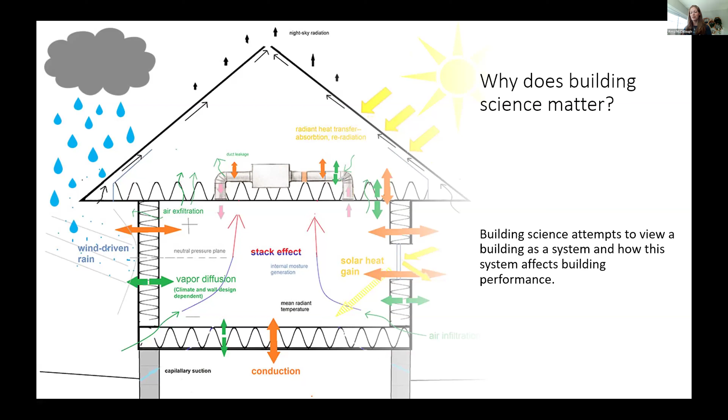What really is going to impact the science of your building and the performance of your building are your walls. Glazing is obviously a very important part of your building performance, your roof, your slab, your HVAC performance—all of that works together. But what we're going to be talking about today is your walls.

And when we talk about walls, we have four control layers: a rain control layer, an air control layer, a vapor control layer, and a thermal control layer. We're going to talk about each of these layers and what they actually mean. What is an air barrier? What is a rain control layer? But what we really want to focus on whenever we're looking at a building is thinking about protecting the structure.

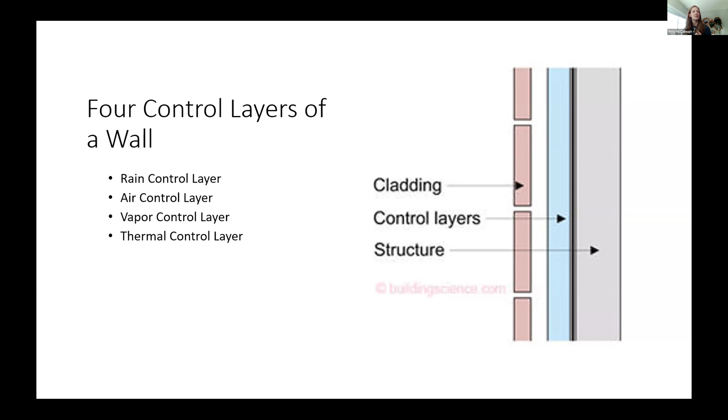Your typical commercial building is going to be a steel stud or a mass wall. When we think particularly about steel studs, we want to create a wall assembly that will protect those steel studs—they're going to be there for a very long time. We want to protect our structure and make sure it can withstand the test of time.

So what is a rain control layer? We know that our buildings will experience rain. I cannot think of a location where it never ever rains, although I'm sure there are some on the planet. We will experience rain, particularly wind-driven rain—not rain that is falling just down nicely, coming off your roof through your gutters and doesn't really drive against the wall. What we're worried about is that rain that comes up hard against your wall and how that is going to impact your structure.

Typically, and this is the most common rain control layer we see, we have a cladding system—brick veneer or metal panels that can allow rain through them, and then they hit our rain control layer. That rain washes down and comes out the bottom of the wall with a flashing, with a drip edge. This is the most common type of rain control layer, but there are three types we're going to talk about: the first is storage or mass walls, then we have barriers and a drained layer. This is a good example of a drained layer, but we'll go through more here in a minute.

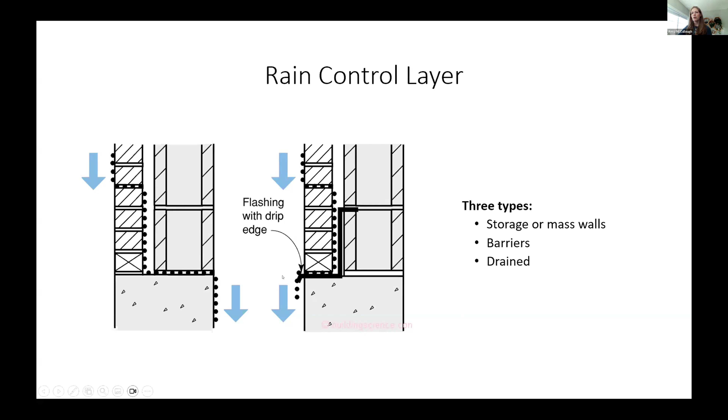Storage or mass walls are also considered to be a rain control layer. So what happens when we have a masonry wall, for example, is that the wind-driven rain hits the wall, and that wall is actually designed to absorb that water and then dry out. That's the key here—when we have these really thick mass walls, they have the potential to dry.

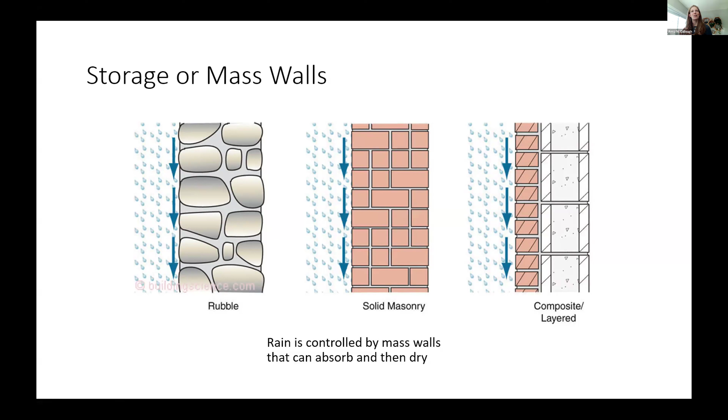I'm going to talk a lot throughout this entire hour about making sure that our walls can dry out, because it is so important.

The next type of rain control layer would be a barrier. These are portions of your wall that, by the type of material they're built out of, will not allow any rain to pass through. So structural glazing, unless you're at a seam, or unless you're at the edge of a panel of glass, you're not going to see any potential for rain passing through. Same with steel-clad panels or a face-sealed EIFS. It's an impermeable surface that will not allow for any water absorption.

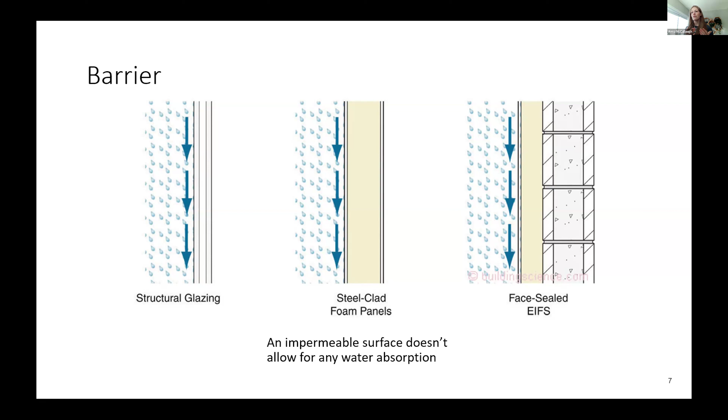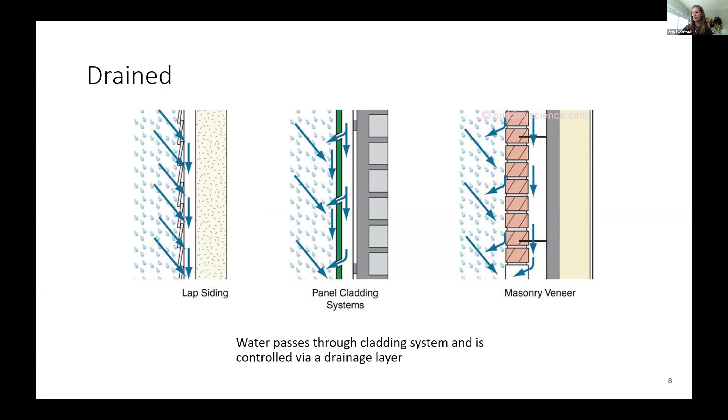The last and most common type of rain control layer is a drained assembly. Rain passes through our cladding system and is controlled via a drainage layer. We have an air gap that allows water to drain down the facade of the building and then pass out through flashing. So that's our rain control layer, the most easily understood layer of a wall, in my opinion. We want to keep rain out, and we want to make sure there's a way for that rain to escape if it does get in.

The next layer we're going to talk about is an air control layer. This is really important because infiltration can make up 10 to 30% of a building's annual energy use unless your air barrier, or air control layer, is continuous. So we're going to talk through a scenario with a negatively pressurized plenum, and how that can impact your infiltration, and why an air barrier is so important, as we get through these next few slides.

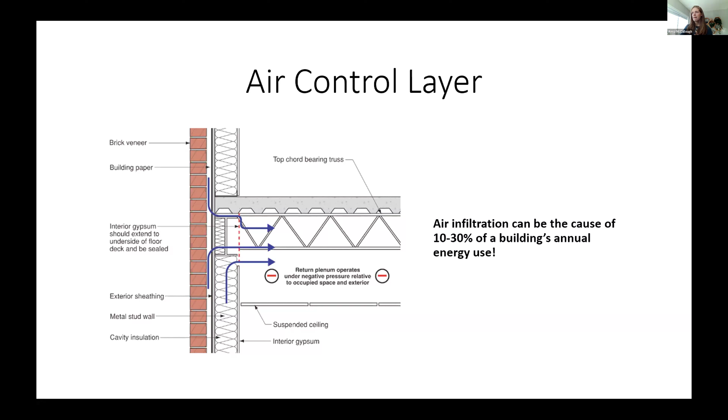An air barrier is the material that separates the outside from the inside, and nothing can pass through it. It is impenetrable - you're not going to get any air passing through it from the outside to the inside. The energy codes, as they've developed, have made it even more clear and really emphasized the necessary requirements and performance of the air barrier, making sure that it is continuous.

We're talking a lot today about walls because it's kind of the basis for building science, in my opinion. But anytime you have a section where a wall is interrupted by a window, or where your wall meets your roof, or where your wall meets your slab, you're going to have a more complex issue than what we're going to cover today. But the key thing about building science, if you take away anything from this presentation, it's that all of these control layers should be designed to protect the structure and should be continuous.

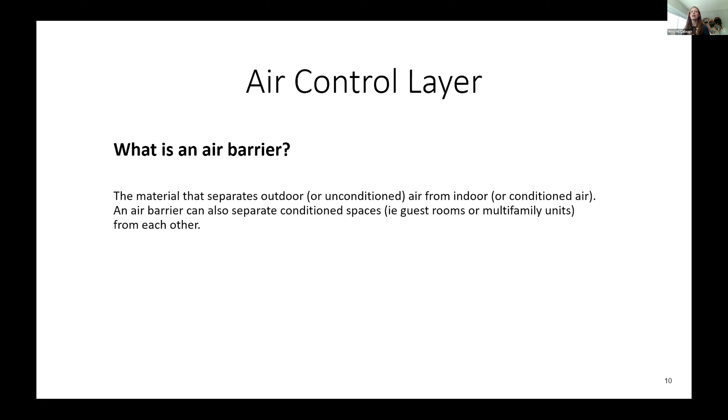Your air barrier should be continuous. Your thermal envelope should be continuous. We don't want to see those breaks that allow infiltration into the building and drive up your heating and cooling loads. So the requirements for an air control layer are that it is impermeable and that it is continuous.

There's multiple examples of that. We're going to talk through exterior air barriers and interior air barriers and what we recommend. But the most common examples we see of air barriers are exterior self-adhered membrane sheets, precast or tilt-up concrete panels - those count as an air barrier - or interior gypsum board can also be an air barrier.

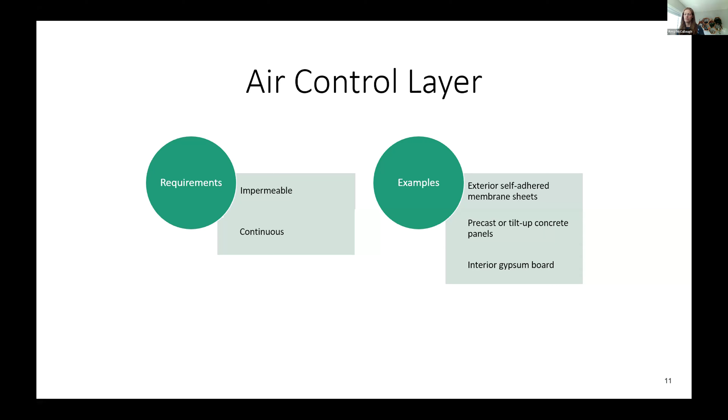So I put hearts here - I figured I was on theme for February. We love an exterior air barrier. Nobody likes an interior air barrier when you're in a cold climate. An exterior air barrier is always recommended in cold climates. We want to make sure we're not allowing cold air to get past our control layers and into our structure, because then you're going to run the risk of condensation, and we'll talk through why in a few more slides. That exterior air barrier also has the secondary benefit of reducing wind washing within the structure. You have a wind force driving against your structure, and with an exterior air barrier, you're going to reduce that wind blowing through your structure.

Interior air barriers are harder to install than exterior. Joints at walls and floors must be sealed.

The benefit of an interior air barrier is that it reduces moisture-laden interior air from infiltrating into your structure cavity, which is a good thing. But we're going to talk about balancing that risk with your other control layers to optimize the building envelope for your climate and for our climate.

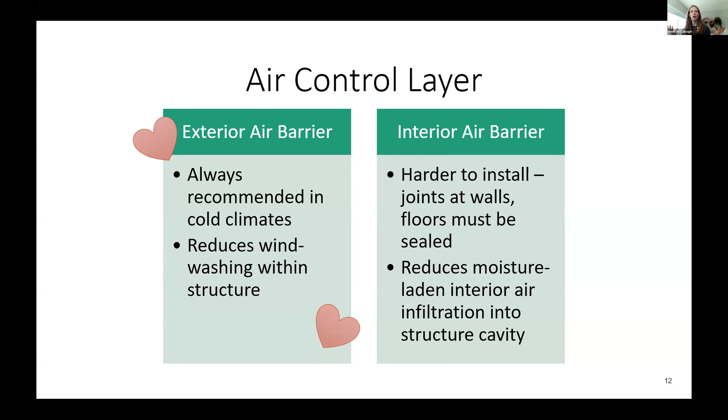Let's talk through this example. This is an example of an interior air barrier, in a multifamily building. The interior spaces are positively pressurized, which we always recommend, right?

We want to have a positive pressure as compared to the outside. The reason for wanting a positive pressure as compared to the exterior is that we want to reduce that infiltration.

In this example, we have fan coil units above the ceiling, creating a negatively pressurized plenum. That fan coil unit, with an interior air barrier, would create a negatively pressurized plenum. Because of that, the interstitial spaces between units—or in a hotel, between guest rooms—become negative. So the walls between these units are negative, and they will suck air in because we do not have a continuous exterior air barrier.

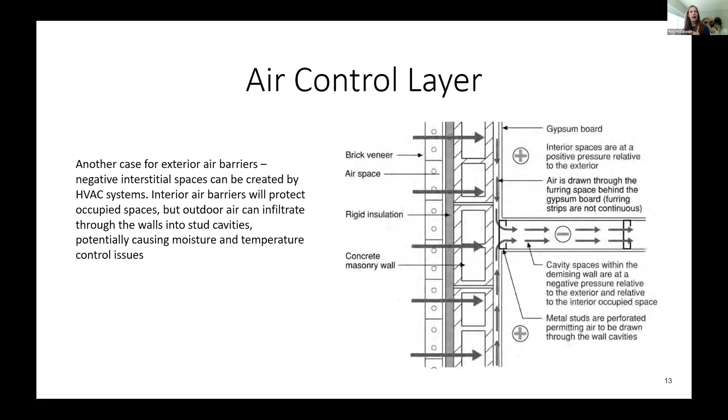And in a minute, on the next slide, stack effect. So we have two examples here of stack effect, when it's cold outside and when it's hot outside. Across the center of these buildings, we have what's called a neutral pressure plane, and that's where the stack effect pressure basically changes.

The best way to think about stack effect is from the idea that we all know hot air rises. So when it's cold outside—we can talk about stack effect on a residential home that's two stories, but it really starts to impact things when we're looking at a multi-story tower. This is a good example, where we have our elevator shaft running up the middle.

What's going to happen is, when it's cold outside, hot air rises and exfiltrates from the top floors. Because of that, the pressure tries to balance, and we end up pulling air in at the ground floors. That's the easiest way to think about it.

And the opposite happens when it's hot outside—we have cold air exfiltrating to the exterior in the summer, and hot air coming in on the upper floors. So stack effect is directly impacted by the height of the building, but we can reduce this infiltration and exfiltration by providing a really solid, continuous exterior air barrier, not allowing the air we've worked so hard to heat and cool, and spent so much energy on, to escape or bring in additional loads via infiltration.

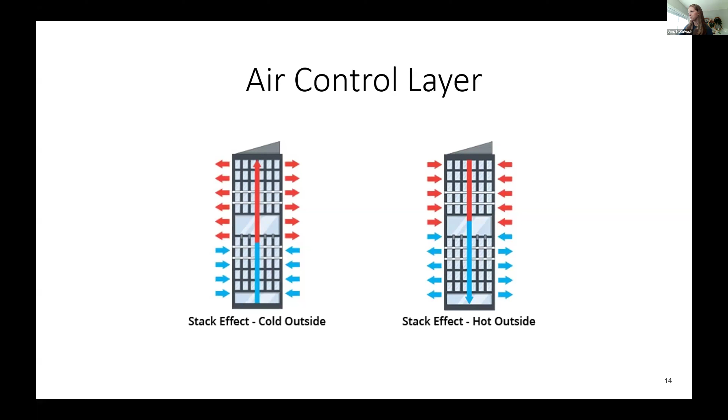The next layer we're going to talk about is a vapor control layer. Oftentimes we hear these being called vapor barriers, and that's really not what we want. Previously, we talked about how important it is to allow a wall system to dry, and we talked about our air barrier being continuous on the exterior.

If we have an impermeable vapor barrier on the interior side of our wall, we can have vapor drying to the exterior from the exterior side of our air barrier, but any vapor within your stud cavity doesn't have anywhere to go. It can't cross the air barrier, and it can't cross the vapor barrier you've installed. So really what we're looking for is called a vapor retarder.

We want to reduce the amount of water that will infiltrate into the wall system from the interior. Think about a multifamily unit, for example—somebody sitting in their living room knocks over a cup of water, and that water hits the wall. We don't want that water to enter into the wall, but we also want to allow any water that is within the wall to dry.

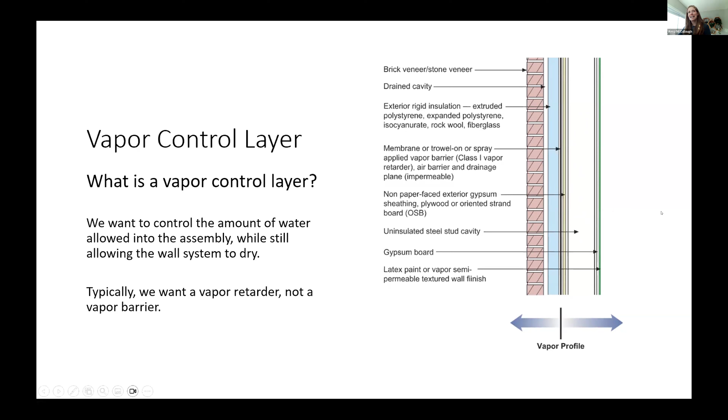So we want to make sure that those materials that were used to build the building can dry. If we have our exterior air barrier on the exterior of our structure, we want to make sure that all of the materials on the exterior side of the air barrier can dry to the outside, and all of the materials on the interior side of the air barrier can dry to the inside. So really important.

We talked about why it's important to obviously have your rain control layer on the exterior. We've talked about why an exterior air barrier is so important and why a vapor retarder is also important. But what we want to talk about as well is the thermal control layer. We know that insulation is key to reducing the heating loads that the building experiences. It allows us to keep in nice, warm air, and it allows us to keep out cold air.

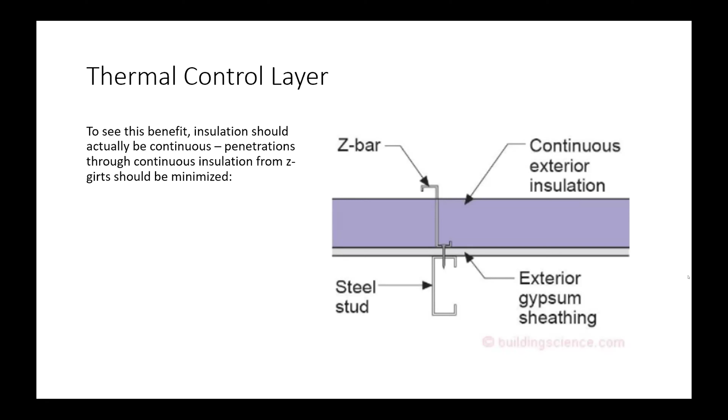There we go. Okay. Yeah, if that R19 was a closed cell or an open cell, is there a potential difference in that dew point or in moisture condensation?

The location where we're really worried about moisture condensation is going to be on the outermost face or surface of the steel studs. Because your insulation is packed within the stud cavities, what we're not seeing is any protection for this metal face of the steel stud out here. And that's where we're most concerned about the potential for condensation.

Whether or not you have a closed cell spray foam, your steel studs are going to provide such a large thermal bridge that the impact for condensation is still going to be there.

Does the closed cell spray foam help to prohibit or mitigate any of the warm air or the transfer of air through a wall to the steel stud?

If you had a closed cell spray foam that completely covered your studs, so we're talking about on the inside face, then we would see that reduction in potential for interior air to pass through. But that closed cell spray isn't going to create a fully enclosed barrier around your steel stud, if that makes sense. It does. Great. Thank you for asking a question.

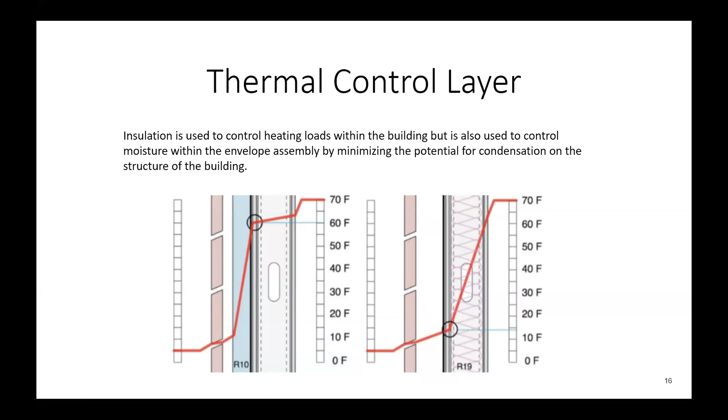So when we are looking at how to most effectively install this continuous insulation, we want to avoid what are called Z-girts. We have all seen them. They are the most common way to do this, we see them all the time. They're built on almost every building. And really, these Z-girts have the potential to reduce the effective R value of your continuous insulation by 40 to 60%.

So if you are installing an R10 continuous insulation and you install just plain old metal vertical Z-girts that are running in parallel with your steel studs, you are going to see a potentially up to a 60% reduction in the effective R value of that continuous insulation, which is a really big deal.

This is why I really try to emphasize the importance of making sure that the materials, particularly the insulation materials we're using, are being used correctly. If we install R10 continuous insulation with no batt, and we have vertical Z-girts that are continuous with our steel studs, it's like installing a potentially as low as an R4 on the exterior of your wall.

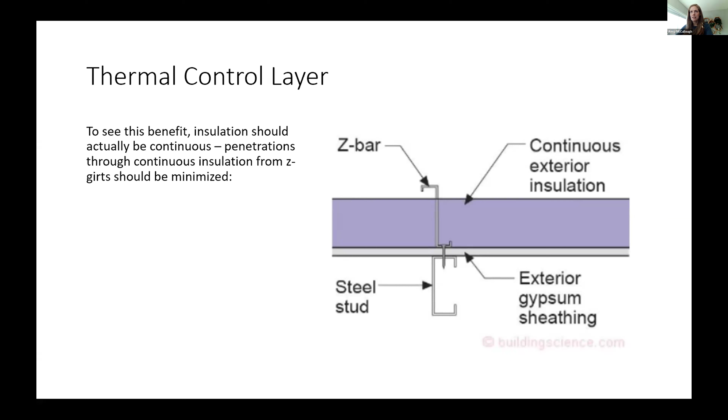So no continuous Z-girts. There are multiple ways to do this. We see the fiberglass clips. We see horizontal Z-girts. We see you can use vertical and horizontal. But in my experience, the most palatable way to do this is to use hat channels and long screws.

So you have a hat channel on the exterior face of your continuous insulation that is held to your structure via a long screw. This is still a thermal bridge. We're still going to see a reduction in the effectiveness of our R value, but rather than a 40 to 60% reduction, we're going to see a 5% reduction, depending on how often you have the screws, but it makes a significant impact.

Not using Z-girts. Those fiberglass clips are great. They are another great option. They will reduce the effective R value of your insulation by 15% or so, but it really depends on the application and how this is being installed.

So again, I'm making these recommendations as considerations. They are not going to be the end all be all, laser shot, perfect solution for every building, but this is what we recommend as a starting point.

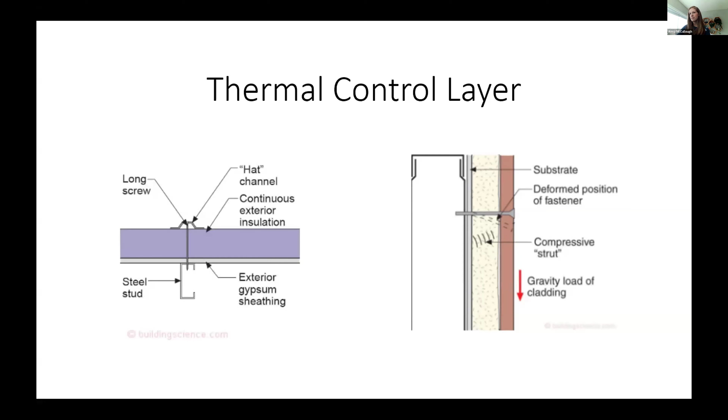Okay, so we've talked through our 4 layers: the thermal control layer, vapor control, air control, and rain control. Now we want to put all of those together and talk about what the perfect wall is. This is a wall that is allowed to dry from the exterior side of our air barrier out, and the interior side of our air barrier out. All of our control layers are protecting our structure that we so want to protect because it is so expensive.

And we are using this wall, and we'll just talk through the different parts of it very quickly. So we have our veneer or cladding system, a drained cavity that allows for rain control. We then have our exterior rigid insulation.

This could be, most often lately we're starting to see mineral wool because people are starting to think a bit more about the embodied carbon of the different types of insulation that they use, but we'll see a polyiso, an XPS, or a mineral wool.

And then we have our membrane, air barrier, and vapor retarder located on the inside surface of our exterior insulation. Then we have our sheathing, our uninsulated steel cavity, the gyp board, and then any sort of semi-permeable wall finish that allows for any vapor that is within the steel stud cavity to dry.

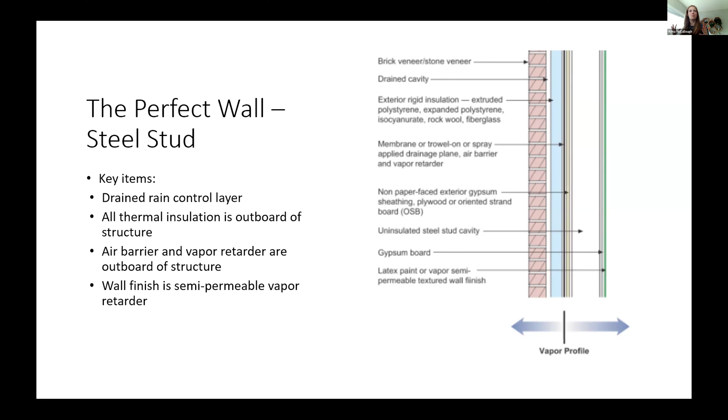The key here is, and I think something that we always hear from, we have a division of our company that is solely dedicated to building enclosure, and their biggest gripe is when people talk about where their vapor barrier should be. It's not - we always want to talk about a vapor retarder, and make sure that we have the language around the control layers of our walls correct, so that we are all talking the same language and making sure that we understand the goal of our wall is to protect our structure and protect our building.